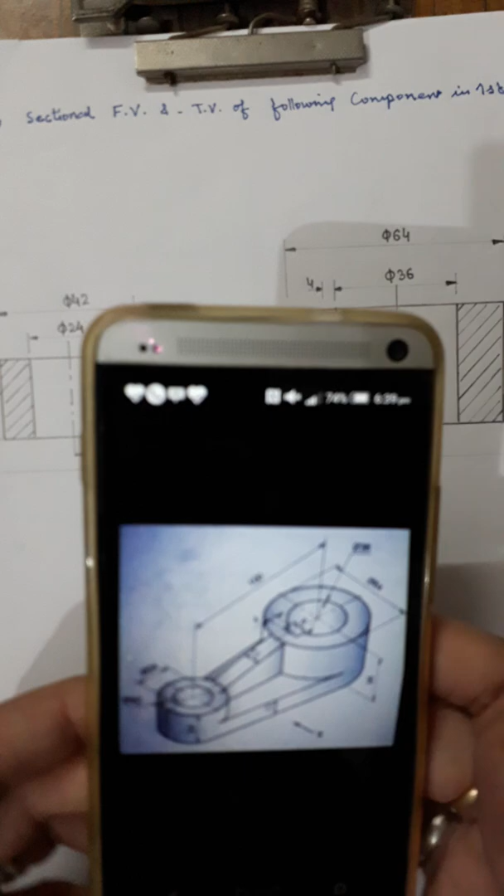Hello students, in this video I will draw the top view of this component. First I will mark the 100 mm center horizontal, then circles 64 mm dia and 36 on the right hand side, and on the left hand side 24 and 42 dia.

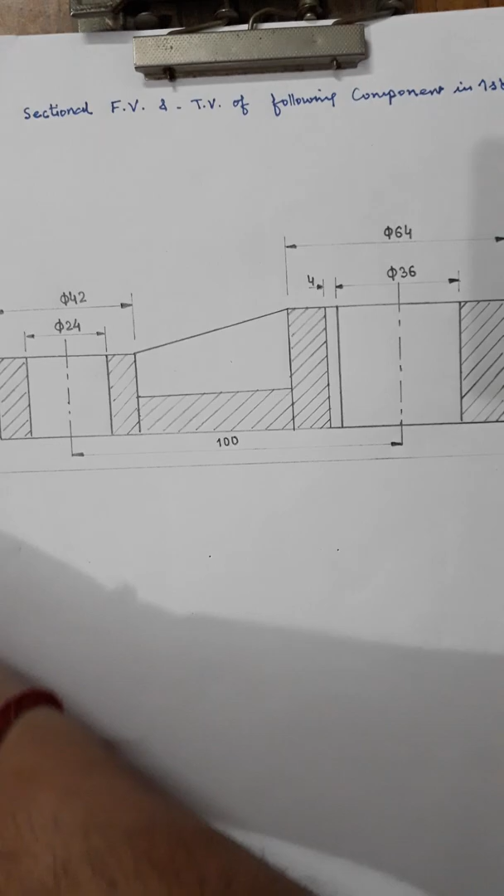I will get these center lines from this front view as well, so I will just extend the center lines from this front view, both sides.

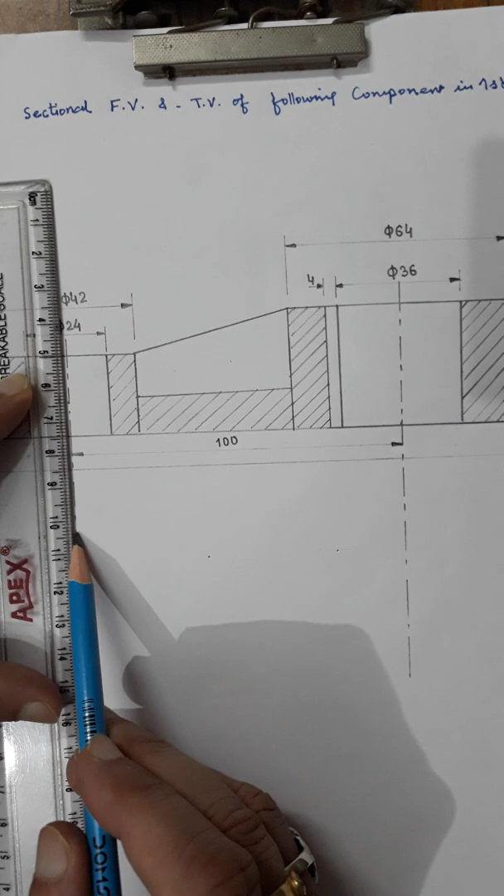Now I'll be drawing the different circles, because circles will be visible in the top view. The maximum is 64, so on the right hand side a 64 mm circle is there.

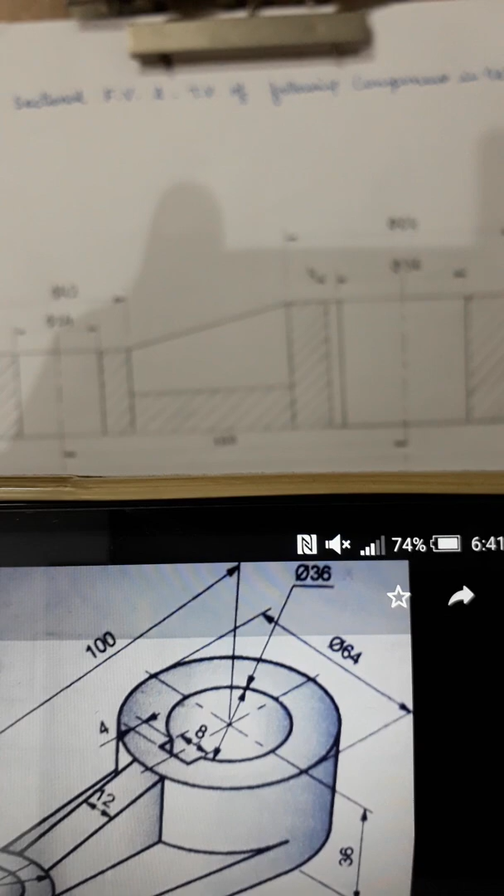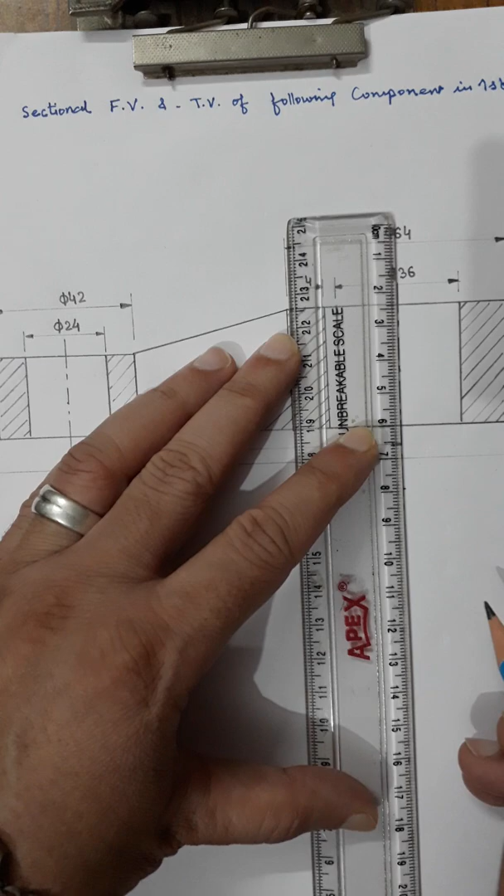I can take 32 as the center, plus 10 mm from xy, a suitable distance. It is 64 mm diameter... 32 I will be taking as the center. 10, 20, 30, 32.

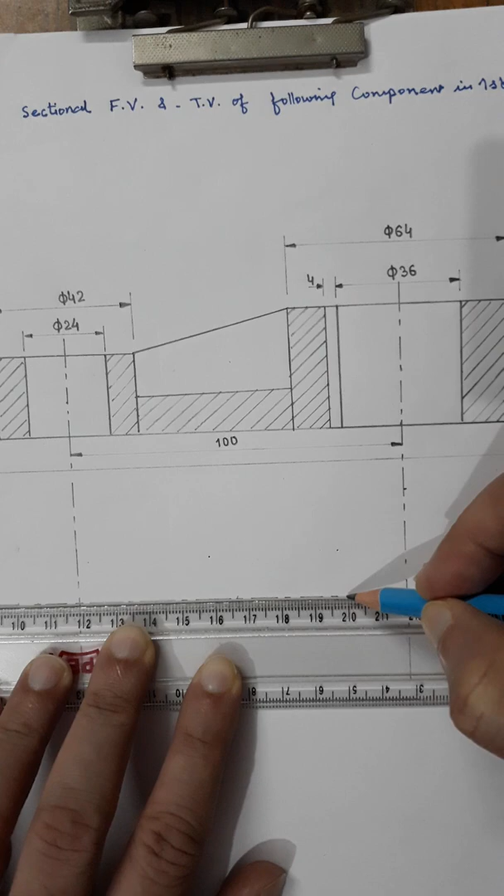I will be drawing the center line through this horizontal center line. Now I will be drawing the circles.

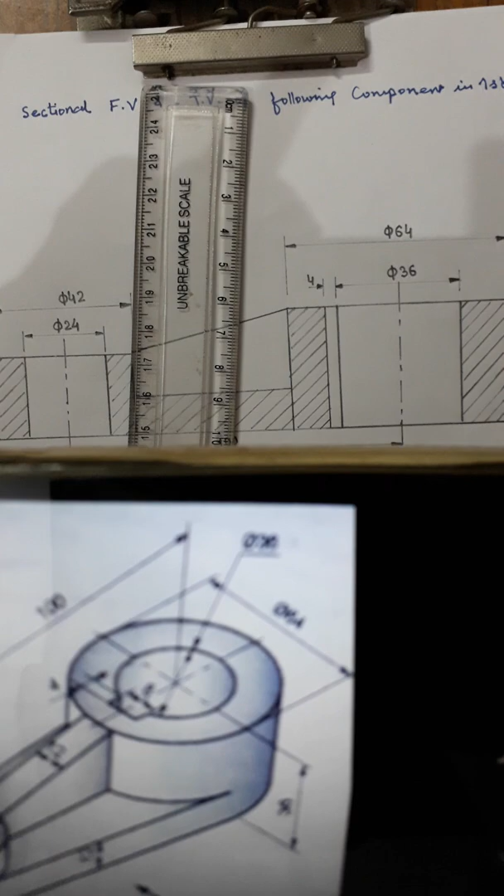On the right hand side you can see it is 64 mm outside circle, and inside is 36. So 64 mm and 36 mm, you can check. I will be measuring 64, means 32 mm.

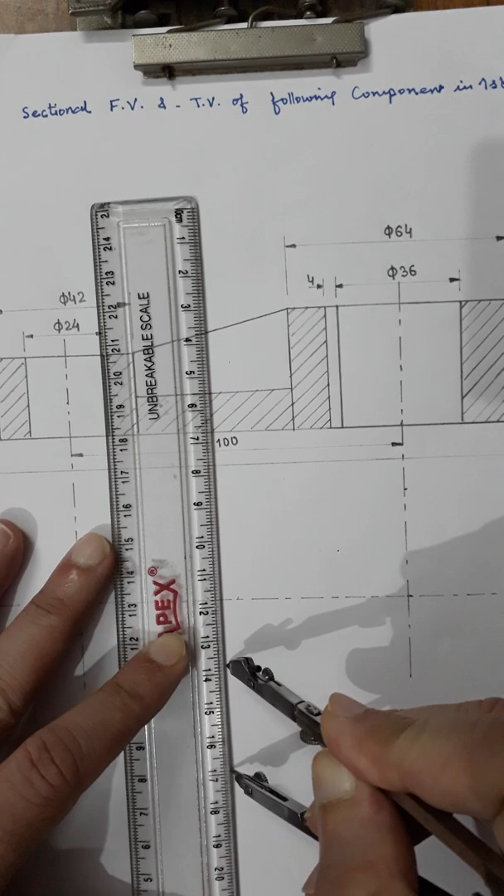32 is the radius. So this is 32 mm I have measured, so I will be drawing the circle. This will be the outside.

After this, now I will be drawing this inside circle, 36 mm diameter. 36 means 18 mm radius. It is 10, 15, and this is 18.

So I will be drawing another circle, the inside circle. It is having a slot as well, that I will draw later on, 4 mm by 8 mm for the key slot. That thing will be there, so I will be drawing a little bit here only up to this, there will be a slot as well.

Now you can see there are two circles on the left hand side, dia 42 and dia 24. Outside is 42, inside is 24.